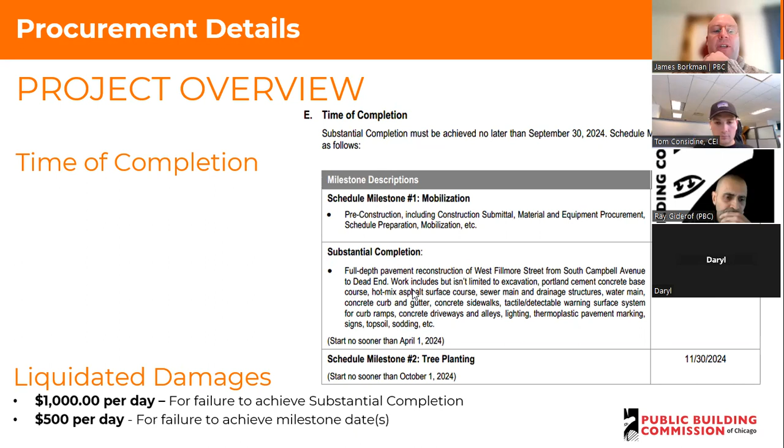As is tradition with the PBC, we also include a list of assist agencies to assist our contractors in meeting our MWBE and EEO goals. All of the assist agencies have a digital copy of the plans available to download and can assist in helping you with those areas.

Following this meeting, we'll have a tech review meeting. It should start about 10:30. Site visit: there's no site visit scheduled. However, we do want to ensure that you are familiar with this site. As you'll hear from the civil tech team and our development team, the site is a unique space, and the bidders are required to become familiar with that space. So we highly encourage you to schedule a site visit to check out the space if you're interested in bidding on this project. It's a fun project. It's interesting, and it's important that the bidders take the responsibility for understanding what they are bidding on.

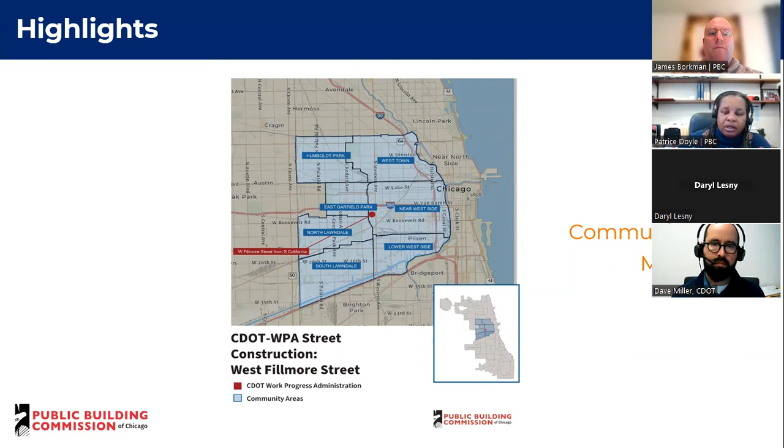This is the community area for the Fillmore project. So 7.5% of the total workforce hours have to come from this community area identified on the map, which is included in the bid package. Next slide.

I believe this is you, James. Thank you, Patrice. The basis of award, we utilize the award criteria figure. So it's the lowest award criteria figure of the most responsible bidder. Remember, the PBC reserves the right to ensure that all bidders are responsive and responsible. Please ensure that your pricing for each line item carries your cost and share of the work, plus any overhead and profit. And finally, any bids that the PBC considers to be materially unbalanced, we won't accept.

We need to make sure that the documents that you're submitting conform to the requirements that we've placed in the bid form, as well as Book 1's instructions to bidders. Please make sure that the entire bid form is complete. As I stated, we need to make sure that we have your surety information and your firm's information, so we can make sure that we're evaluating each bid.

Patrice. Okay. The MBE/WBE participation for this project is 26% MBE, 6% WBE. As James mentioned earlier, we only accept certification from City of Chicago or Cook County, and the firm must be certified in the scope of work that they're performing. If they are not, they cannot receive credit. Manufacturers receive 100% credit, suppliers receive 60%, and brokers 0%.

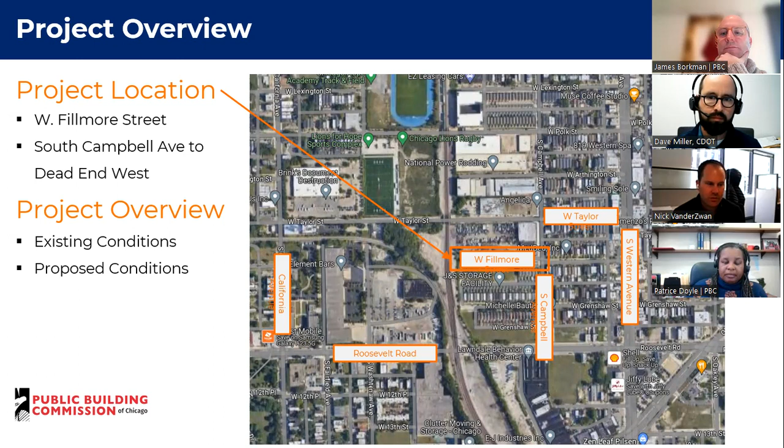So the project will construct a new street west of Campbell. It's about a block long, 660 feet approximately. We'll go through the existing conditions, which are rather unique compared to some other projects, as well as the proposed conditions.

Like Dave mentioned, it's new street construction, which can be somewhat unique for the City of Chicago, which is pretty built out these days. It does run between two private properties, currently built out residences on the south, as well as an open lot there, and then businesses on the north side of what will be Fillmore Street.

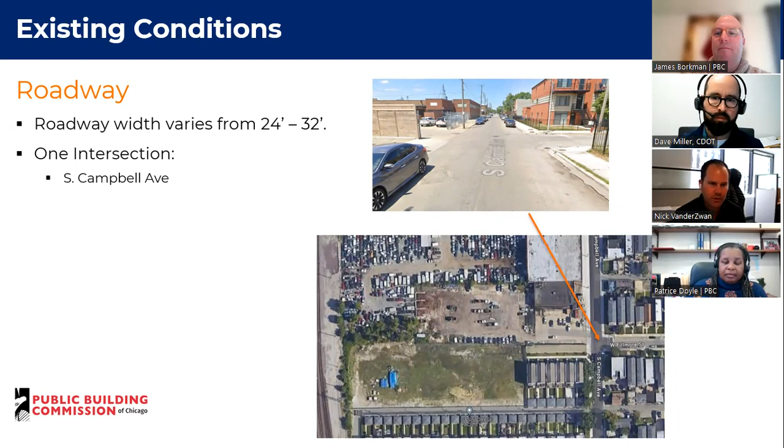The width through that area currently varies. It's providing access to those residences as well as to the private business. So 24 to 32 feet is the current roadway width.

Additional existing conditions here. As we mentioned, there's no real street west of Campbell Avenue. It is brick pavers along the residences there to the south of those two fences, the wood and the chain link fence, and then a driveway and parking lot access north of the fences there, providing access to a Safe Haven landscaping business as well as other businesses tucked back in there.

Currently, you can see there's no curb and gutter north of the fences, which leads to some drainage issues, which are typical of all these WPA streets. There is currently sidewalk on the south side of the residential access points along and fronting the houses there, as shown.

At Campbell and Fillmore, we will be improving pedestrian access by providing east-west access across Campbell, providing access at all four corners of the intersection. As I mentioned, there's currently fences, both chain link and wood slat fencing, that will need to be removed as part of the project. And those pavers south of the fences will also be removed as part of the overall reconstruction project.

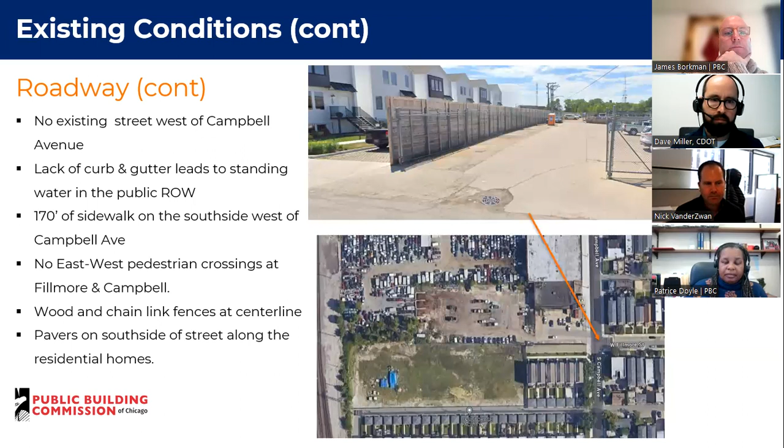Right now, there are some utility conflicts along Fillmore and along Campbell. There are 6 utility poles owned by ComEd. They are in the process of designing and submitting to OUC to relocate those poles. So that utility relocation will be done by ComEd. It will be designed by ComEd, and they will do the work as part of our larger project.

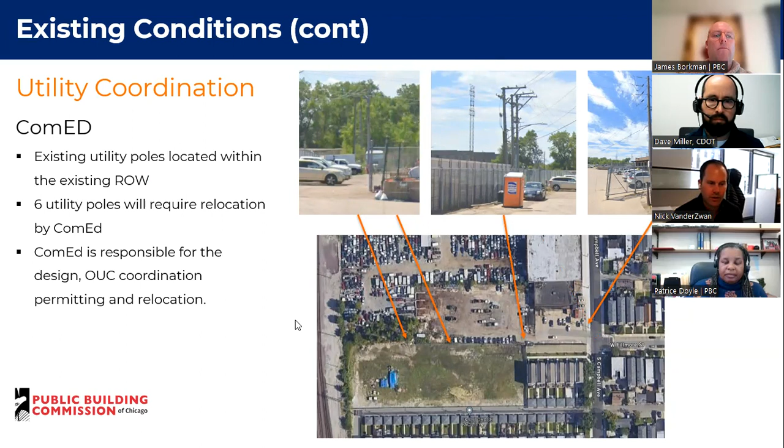There you can see the plan view of proposed Fillmore running from Campbell to the west, where it curves around and dead ends close to those railroad tracks. As part of the project, we will clear and grade primarily west of the existing residential access. We'll do full depth pavement reconstruction, and the roadway will be widened to a 30-foot continuous width for Fillmore.

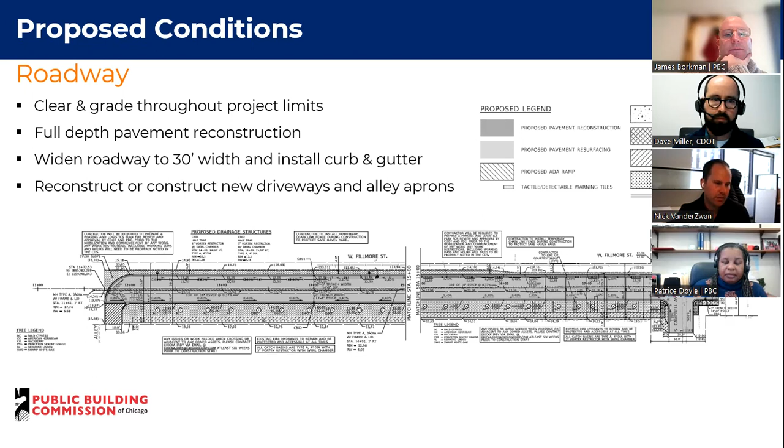Curb and gutter will be installed on both sides of the street. North and south sides of Fillmore will have a new curb and gutter. The project also looks to construct new driveways and alley aprons. We'll show on further slides, but the driveway will be reconstructed off of Campbell on the northwest corner, and there's an alley apron construction at the western limits that curves around to the south. For stormwater, there are proposed catch basins that will be installed as part of the project.

We are also removing existing sewer main line. There's a 12-inch sewer line in the eastern portion of the project that will be removed and replaced with an 18-inch sewer main. And that 18-inch sewer main will continue to the west, just beyond the curve at the western limits. There's a manhole which will be installed and will tie into there.

Also on the east leg of Fillmore, just east of Campbell, we are relocating 2 sewer structures. They're currently located within the ADA ramps, so we are moving those around to the east and getting them out of the pedestrian crossing area. You can see those 2 catch basins on the bottom right of the slide there.

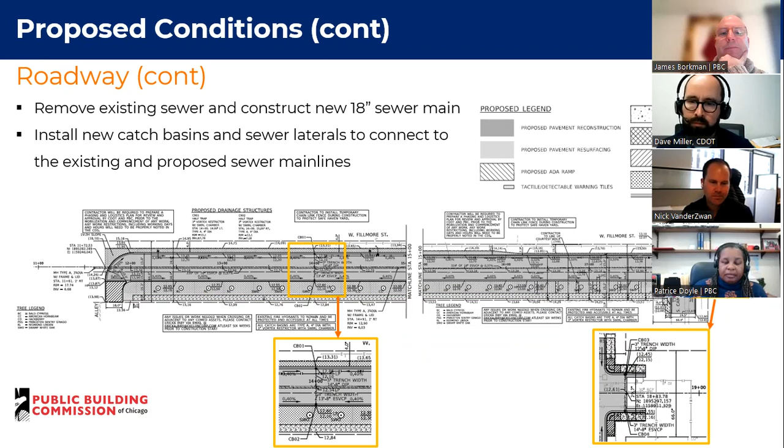As I mentioned, there will be new sidewalk on the south side of Fillmore, a continuation of the sidewalk currently located in front of the residences. But we are not proposing sidewalk on the north side of Fillmore. So just on the south side and connecting to the sidewalk currently existing in front of the houses there.

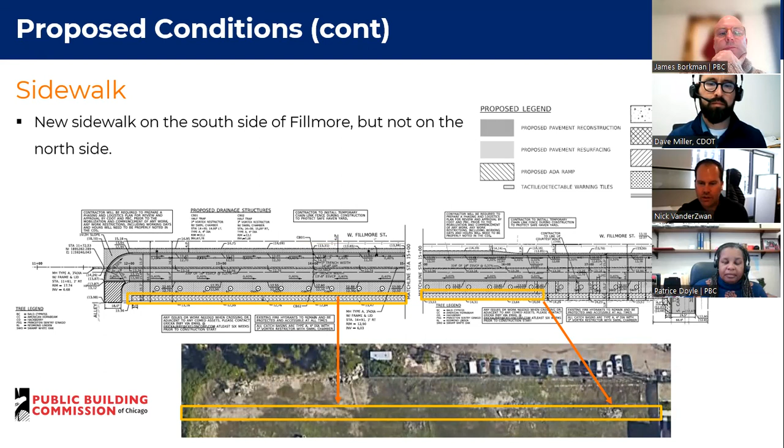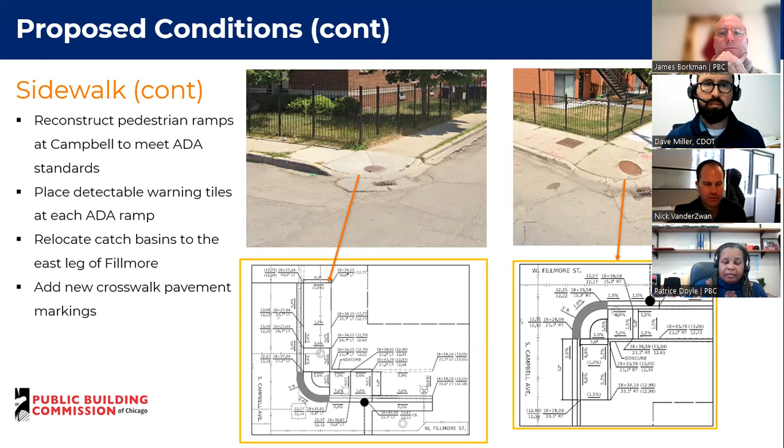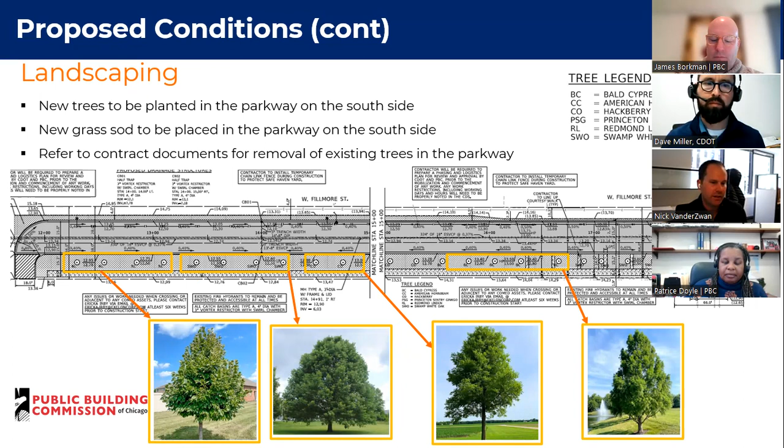Pretty extensive landscaping is proposed just on the south side of Fillmore. Some tree examples are shown there at the bottom. Those trees have been recommended by the Bureau of Forestry. So those trees will be installed as part of the project, as well as sod in the parkway on the south side of Fillmore.

As I mentioned, driveway improvements to provide access to the Safe Haven landscaping business. That will be installed on the west side of Campbell, just north of Fillmore. That'll be a 35-foot driveway. There is currently a gate that prohibits access during off hours to the business. The property owner will relocate that gate and align it to the proposed driveway.

The contractor, as part of this project, is required to maintain access to the business located north of proposed Fillmore. So that's something to keep in mind. This project will require a little more coordination compared to the previous WPA project with businesses located north of Fillmore. That work there will take place after ComEd has taken care of their relocation, because their poles are currently located in the proposed driveway location.

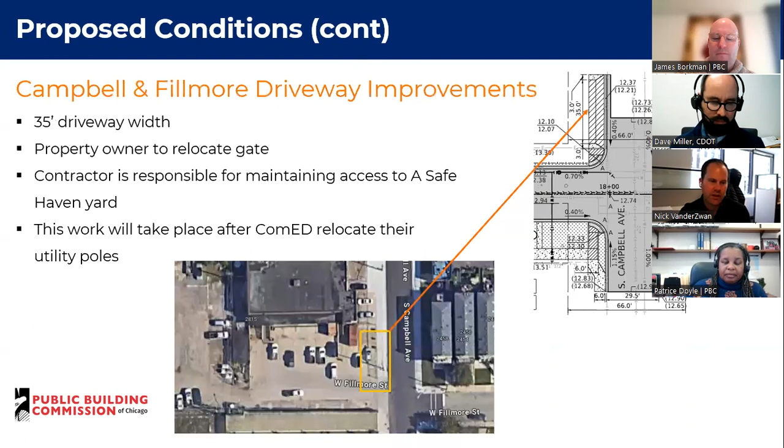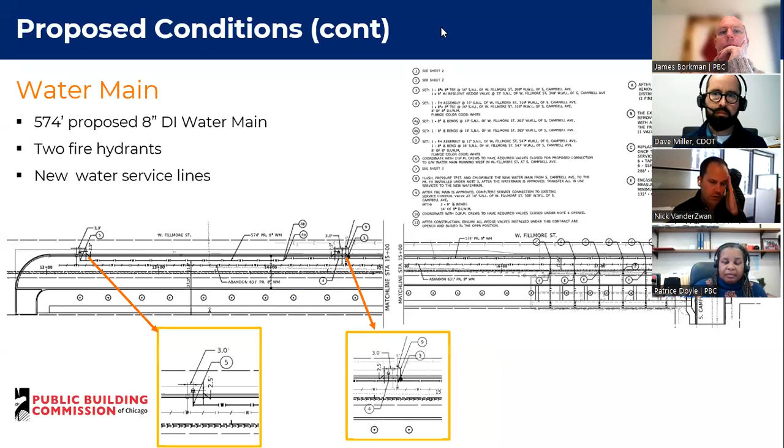Also, a new part of the scope for Fillmore is proposed water main. The water main will be replaced in its entirety along Fillmore, and there will be two new fire hydrants installed as part of the project, as noted there in those inserts. And then there are currently water service lines that provide water to those residences on the south side of Fillmore, closer to Campbell. Those service lines will be replaced as part of the project as well. So again, this project requires coordination with DWM Water to ensure the water is transferred over to those new services correctly and safely.

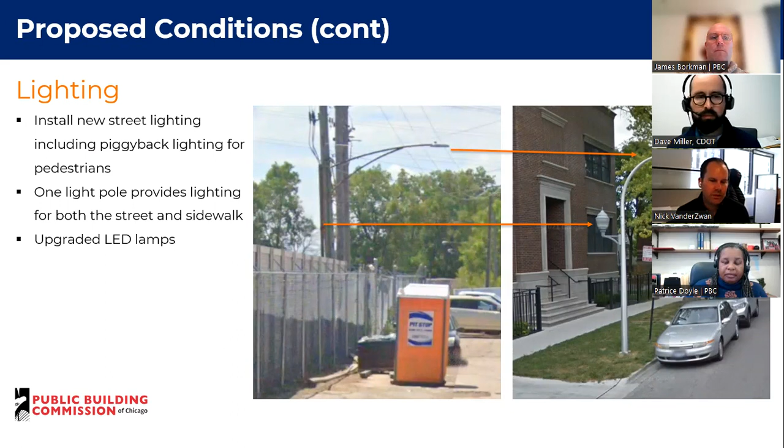There is also proposed lighting on this project. Just on the south side of Fillmore, the new streetlights will have the piggyback lighting, which provides lighting for pedestrians on the sidewalk, as well as the typical street lighting for vehicles on the roadway. The new lamps will be the LED standard that CDOT has been installing. So that's a typical lighting installation project for Fillmore. And that concludes the technical review.

Dave or Jackie, if you have anything to add, if I missed or forgot anything, please add. Thanks, Nick. I think you covered it well. Yeah, great work. Thanks. Thank you. Just a reminder that access will need to be maintained for that business. Is that correct? Correct. Yeah.

And then we do have our contract officer from the PBC from the development side, Louis Chavez. He is on the call. Unfortunately, he has a technical issue, so is only able to listen. But with that, I will turn it over to Veronica or Daryl. If anyone has any questions for us, we're happy to answer them now. This is Daryl from Passion. I don't have any questions at this time. If we do, we'll submit them.

No questions, Daryl? Nothing exciting? No, not right now, no. We like that. Means Nick did a great job. Veronica? Okay, I'll take silence as consent.

I know that Louis can't say anything, but just as a reminder, sole point of contact is myself. Daryl, if you have any further questions, make sure you submit them to me. I'm happy to get them in an RFI and answer them as quickly as possible.